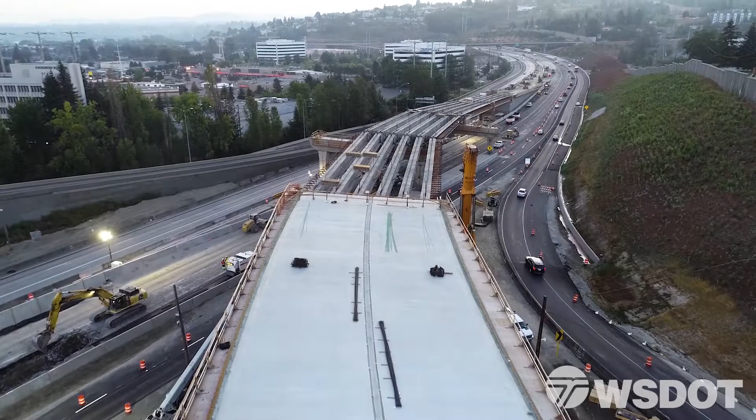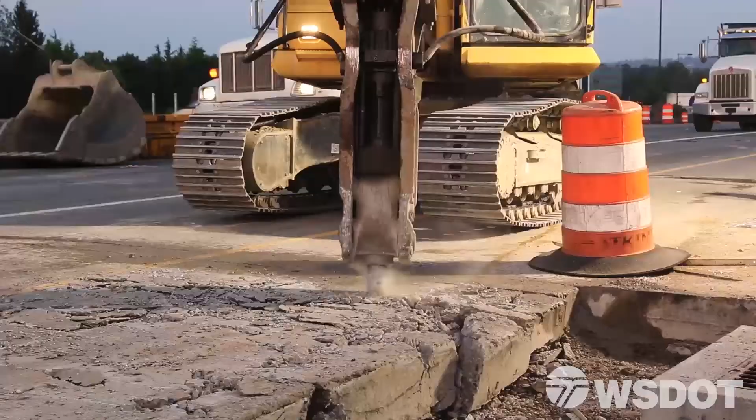Hi, I'm Kim Henry. I'm the 405-167 Program Administrator, and I am here to talk about a potential change that may occur at the Northeast 44th Street interchange.

Normally, we would like to do this meeting in person at a public open house, but due to everything that's going on right now, we're following King County directions, and so we are going to do this online. We do welcome your input, and we would like to hear back from you.

The contractor proposed this change because we have several different project goals that they are required to meet throughout the life of this project. One of those goals is to minimize impacts. They have come up with a new strategy that really does minimize construction impacts, but also has some long-term benefits as well. So we want to go through those and talk about each of those different areas.

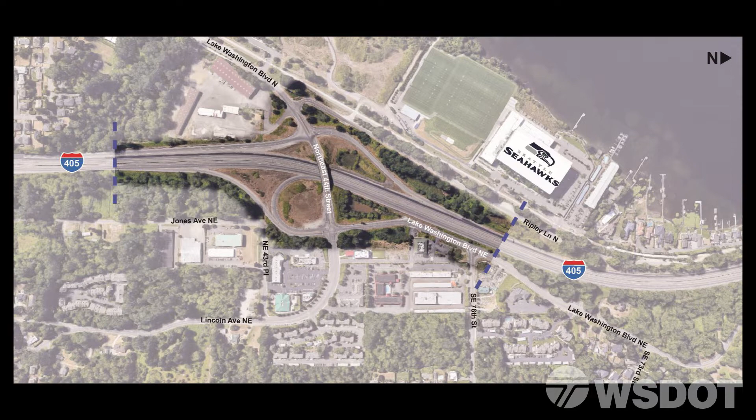The area that's being impacted is the area right here at 44th, and it's the area highlighted on the map. The area right at the Seahawks, the very north end of the project area, is where that transitions back into what had previously been designed. The same thing at the south end, right there at the May Creek area, is the area where it transitions back into the same exact design as previously. You can also see that it just really affects the area right around the interchange.

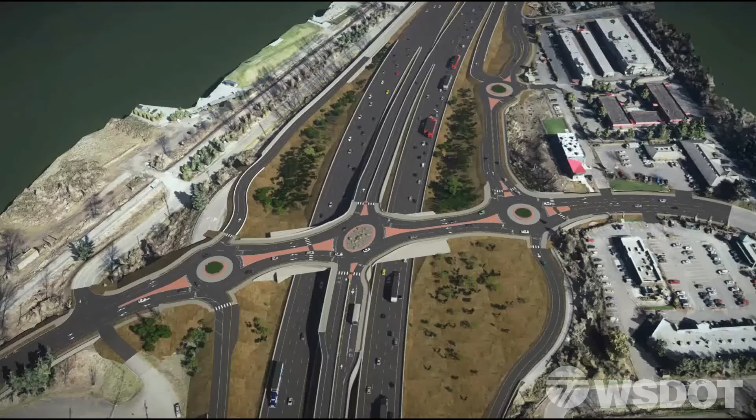I think we've shown this video many different times, and you may have seen it before. This shows the previous design with traffic in and around the roundabouts. As we are looking here, north is to the top of the page. There's a roundabout at the very north end here where the northbound on-ramp gets on. You can see that design and the traffic going through the interchange there.

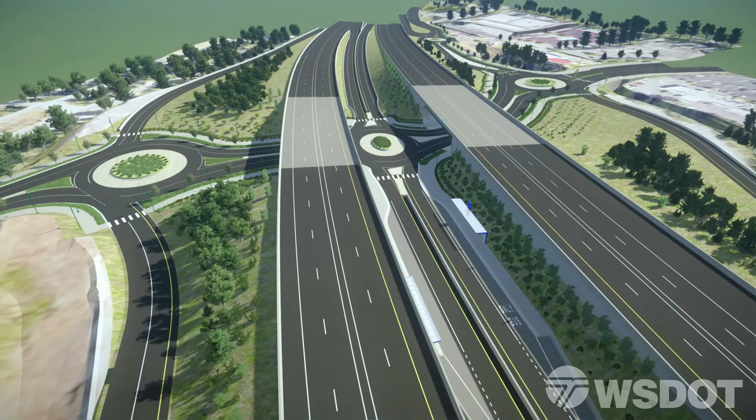The new design is just slightly different. With this design, we have 405 going over 44th, and 44th is at ground level and goes underneath of 405. This represents much flatter grades for bikes, pedestrians, and ADA access. There's a big advantage to that, but it also provides better opportunities for planting vegetation in and around the interchange.

That is not an easy thing to do, to put vegetation on top of a bridge. So by being down at ground level, we can get much more of the natural vegetation in. As we go underneath the bridge, you can see that in the bridge area, there are vertical abutments. There are also lots of rocks and gravel, and that makes for a very uneven surface and prevents people from spending a lot of time in and around those areas where they can't get comfortable.

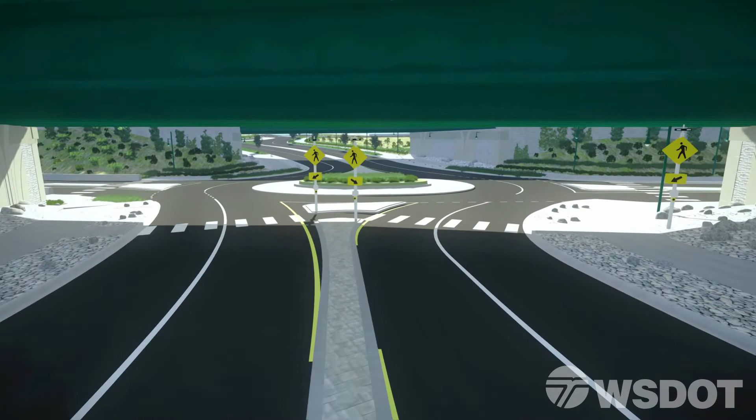As you can see here, there's a lot of space between these two bridges, almost 100 feet or more than 100 feet, which provides for a lot of open light spaces. There's also will be a lot of illumination underneath the bridge, providing a lot of light as well.

The BRT transit stations are here on the ramp themselves, and you can see instead of being up in the air where they are subject to more noise, they are down tucked in against the walls, which actually shields them from a lot of the traffic noise, making this a much better pedestrian environment.

One of the things that we wanted to really look at was how this new design is going to affect a number of different things that were reviewed in the environmental documentation for the project, and one of those areas was noise. So we did do a complete new noise evaluation for the area with the new design.

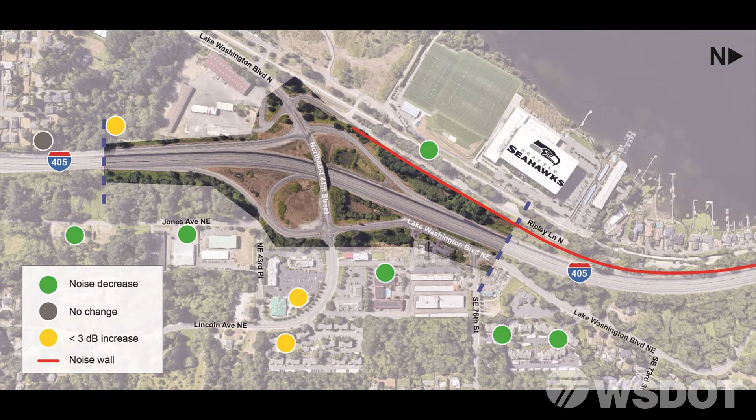What we have here are three different colors showing the different changes that occurred. The green shows where there was a decrease in noise from the previous study to now with the new design. The gray is area where there was no change. The yellow is an area where there was a slight increase in the actual noise levels.

At these locations where there was a slight increase, they were all below the criteria level for evaluating whether a noise wall could be included or not included. So while there was a slight increase, it did not rise to that level where a noise wall would be considered and evaluated. Also, they were very slight increases - 3 decibels, our noise experts tell us, can't actually be heard, and these were less than 3, so very minimal change overall.

My name is Jim Laughlin. I'm the Technical Services Manager. I manage the Air Quality, Noise, and Energy section here at WSDOT.

The original design had the 405 main line traveling under 44th, and the new design has the 405 main line traveling over 44th.

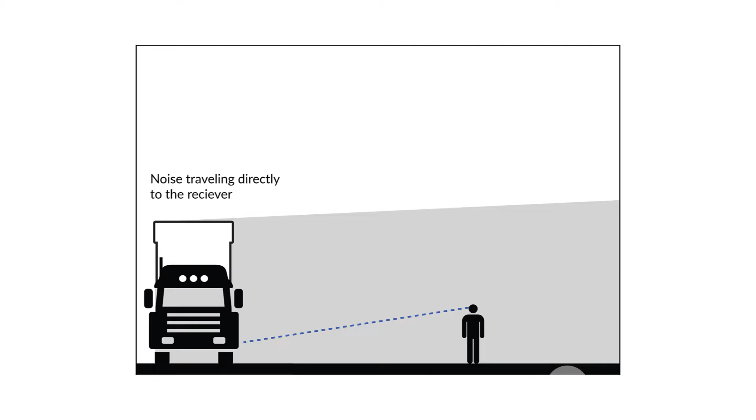The main source of noise from highway traffic is generated where the tires meet the pavement—essentially where the rubber meets the road. But the tire-pavement interface noise travels to the receiver in a direct line, and then it dissipates over that distance by about 3 decibels for every doubling of the distance. So it decreases by that amount as you get further away.

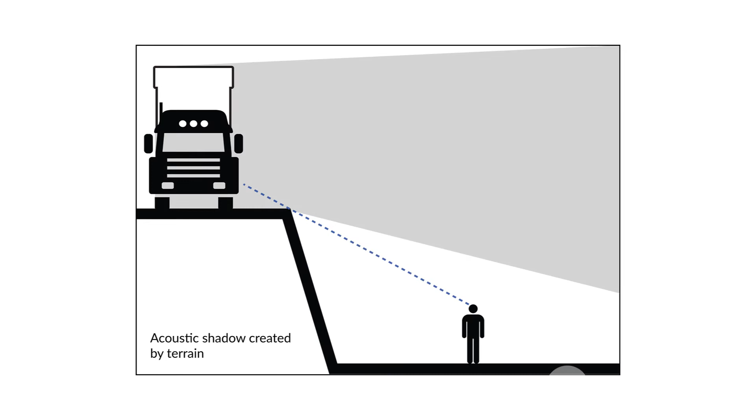If you have an elevated source, if the highway noise source is on a bridge, for example, and you're down below that bridge, the edge of that bridge actually shields the receiver from the tire-pavement interface noise from some of the lanes of traffic. But wherever noise is shielded and the line of sight is broken, you'll get at least a 5 decibel noise reduction just from breaking the line of sight.

Even some of the short concrete crash barriers you see along the highway can have a small effect on the noise by blocking the sound at the tire-pavement interface. But as far as our model goes, because it's a very conservative model, it doesn't really have an overall effect on the outcome. It can, however, have a significant effect on receivers nearby, so we could expect some improvement with having those barriers as part of the project.

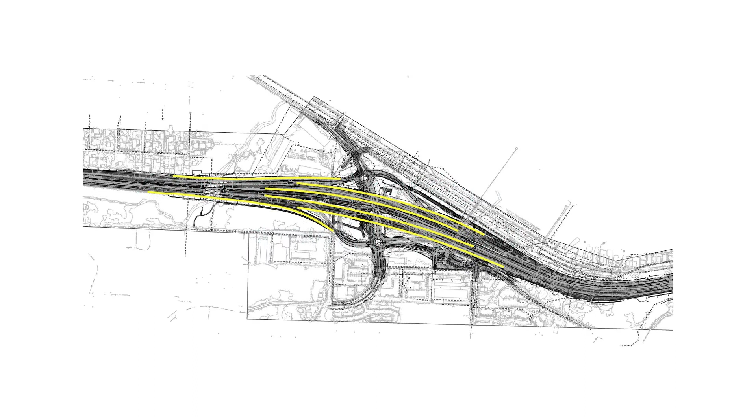One of the main things I saw in the updated noise study was that the noise levels at these receivers are still below impact. Raising the elevation of the main line, the 405 main line, is not going to increase noise levels, and they're certainly not going to increase noise levels above the impact threshold. I think that's important.

Now I'd like to talk about one of the main benefits of this new design, and that has to do with the construction phasing and sequencing. This is so important because it really reduces the impacts during construction. Construction is a very difficult time, particularly for this area, because we have so much congestion. One of the keys is keeping traffic flowing with minimum impacts. This new strategy allows the contractor to do a significant amount of work offline that does not impact the traveling public, and does not impact flow in and around the interchange nearly as much as the original design.

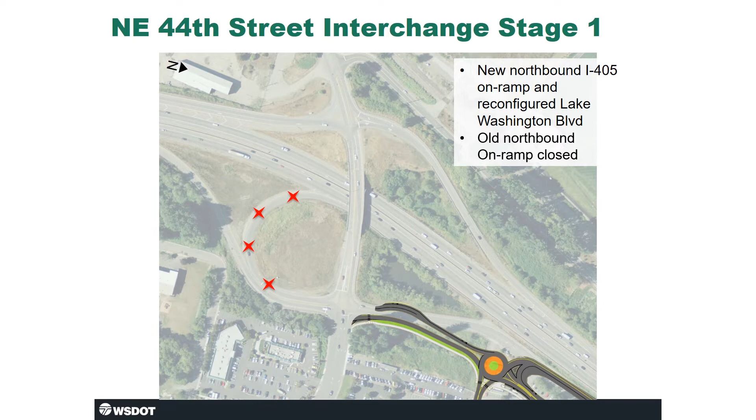So take a look at how those changes will affect traffic overall. The first step is for the contractor to build the north roundabout that also provides access to northbound 405. This moves the on-ramp from the current location up north. Once that is done, the existing loop ramp can be closed. Once the loop ramp is closed, the contractor plans to start building the northbound mainline bridge, keeping Northeast 44th open to all traffic. During that time, the bridge will begin construction without impacting any traffic.

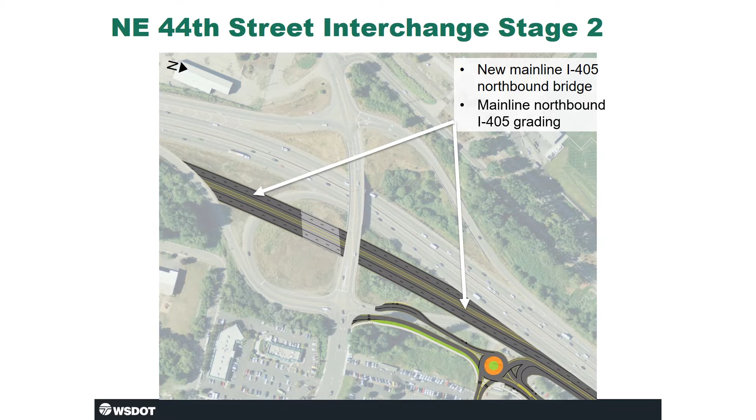Then they can build the mainline roadway of the freeway on either side of that bridge, doing most all of the work ahead of time before there's ever a traffic switch or a need to impact traffic. Then they will build the roundabout on 44th itself, still using the bridge over 405. You can see there's a little piece of roadway that gets built down under the new bridge—that won't be open to traffic yet. It will just get constructed and ready for the next phase.

The contractor will also build the northbound off-ramp to that roundabout. That is the first step, which allows the contractor to be set up to do one full weekend closure to really prepare for the next phase of this work. A lot of work will happen over the course of this weekend closure, and part of that work is putting in a temporary connection for 44th. Once that connection is in place, they no longer need to have traffic on the bridge over 405.

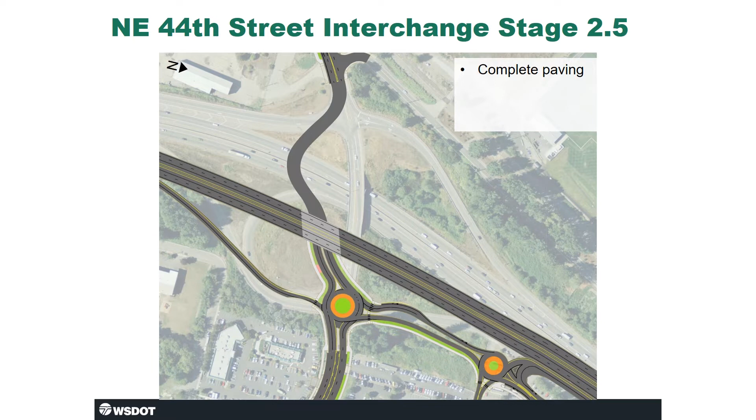That bypass is only temporary, and then they will connect that bypass up with a new temporary southbound off-ramp and southbound on-ramp. Traffic will shift to that new alignment, and traffic will also shift onto the new alignment for 405. So both northbound and southbound will be going, on a temporary basis, over the same bridge that was built just for northbound travel. Once that is complete, the bridge that carried Northeast 44th can be demolished offline without any impacts to traffic in and around 44th.

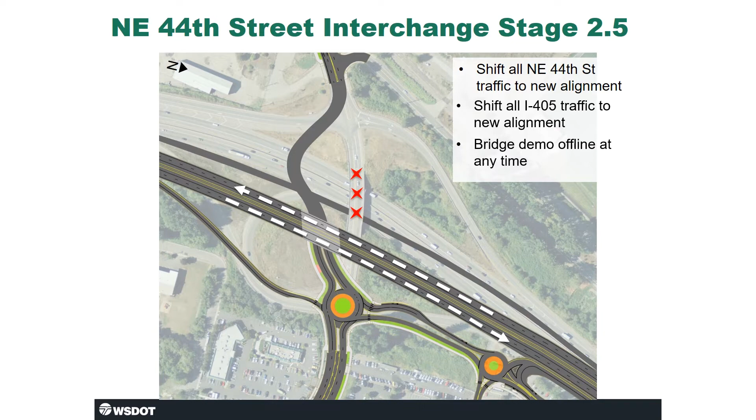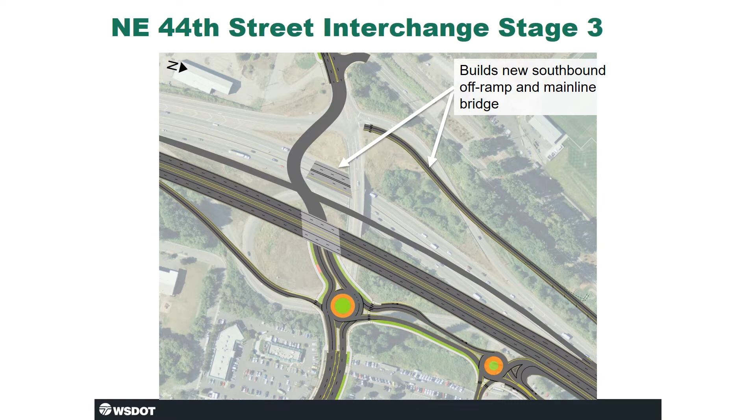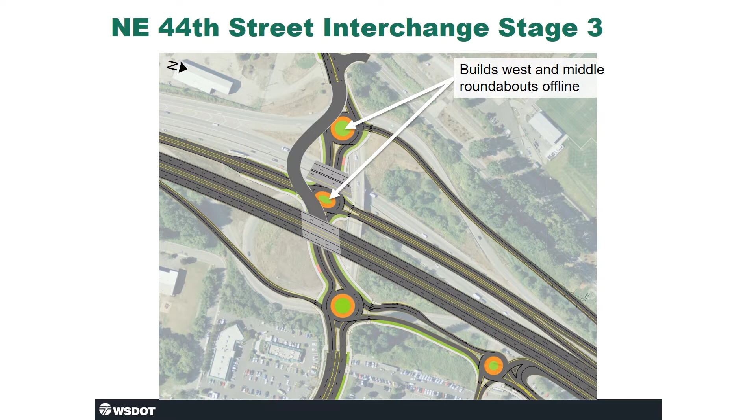Then most all of the construction can occur offline from that point forward, which is really where the big benefit comes in. At this point, the contractor will start work on the new southbound bridge and build that offline. They'll also build the new southbound off-ramp offline, not impacting traffic. Then they will construct the new roundabout for access in and out of the express toll lanes, as well as the one providing access in the southbound direction at 44th, connecting with a new southbound on-ramp, and completing the rest of the roadway on either side of the bridge.

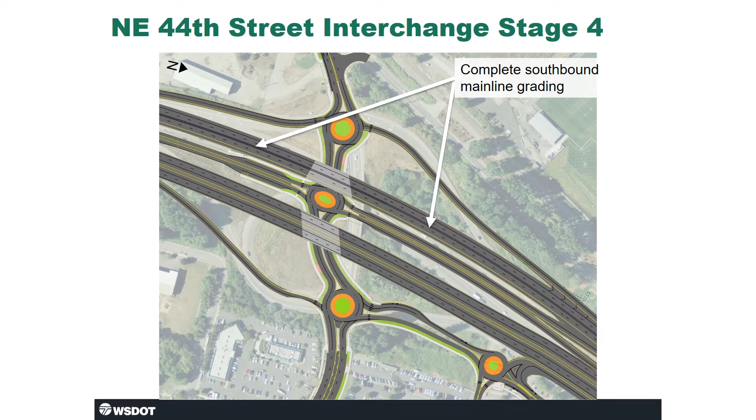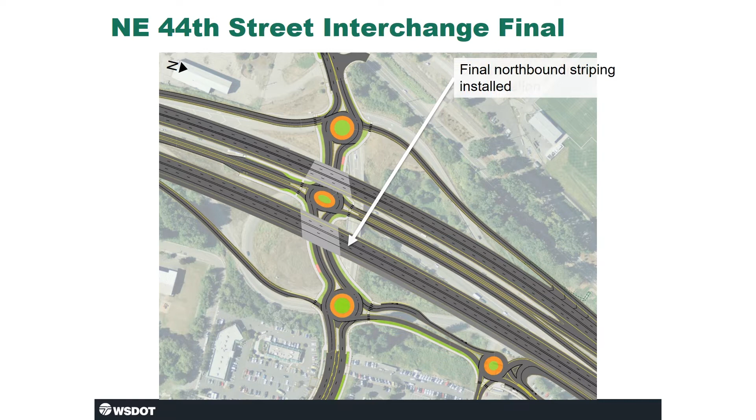The next step is to restripe the northbound direction, put traffic onto the new alignment for the southbound direction, and most all of that work has now been completed without major impacts to traffic and major traffic switches back and forth. So much better overall in terms of the impacts.

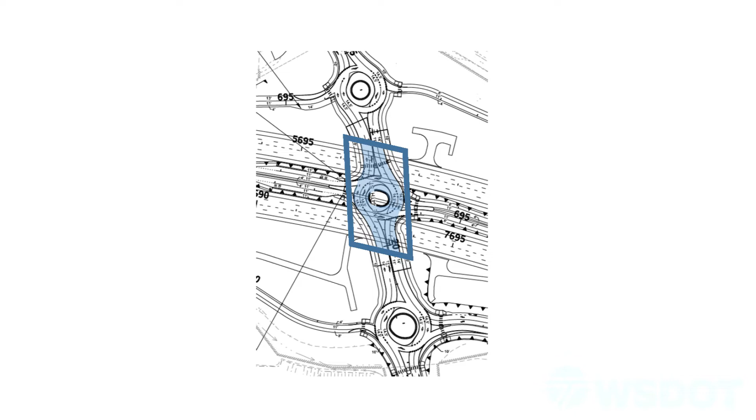One of the other areas we've heard questions about is whether this new design changes maintenance responsibilities. We've taken a look at what changes would occur if we did change that design. That area is highlighted here in the blue box. Nothing outside of that blue box will change in any way, only the area right in the blue box.

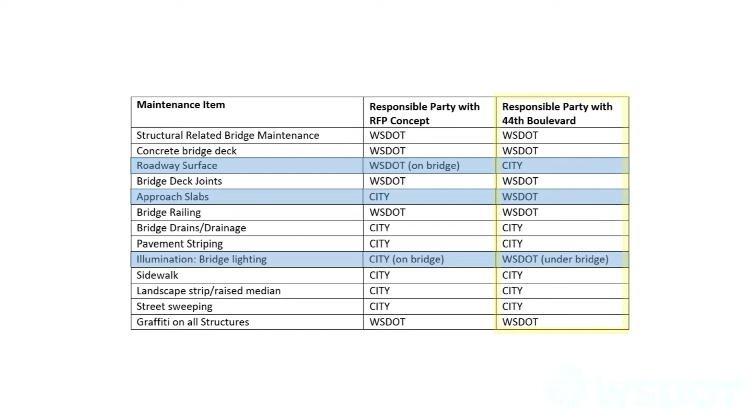We took a look at all the different maintenance responsibilities that are part of an interchange, and then looked at what would change under one design versus the other. Under the original design, we have a column showing who was responsible, and the column next to it shows what happens if we put 44th down at ground level and how those responsibilities change. WSDOT took on responsibility for two of the areas, and the city now takes responsibility for one. So only three areas were impacted, with WSDOT taking on responsibility for two versus one for the city.

Hi, I'm Carl Westby, traffic lead for the 405 program. From a traffic operations perspective, these things are going to function the same. Our original concept had a series of roundabouts, and this new concept has a series of roundabouts—same type of design. So operationally, for both vehicles and pedestrians, they will function the same.

Safety performance for roundabouts is they provide some things you don't get at a traditional signalized intersection, and the biggest piece is the number of conflict points. Conflict points at a modern roundabout are very simple: you first have an interaction with a pedestrian at the crossing, then you drive forward and a vehicle has an interaction with other vehicles in the roundabout. They only need to worry about the vehicles to their left, enter the roundabout, and decide where to exit. Compared to a traffic signal, where the lefts, throughs, rights, and pedestrians are all happening at the same spot, it becomes a little more challenging. So we see a lot of benefits for safety from roundabouts.